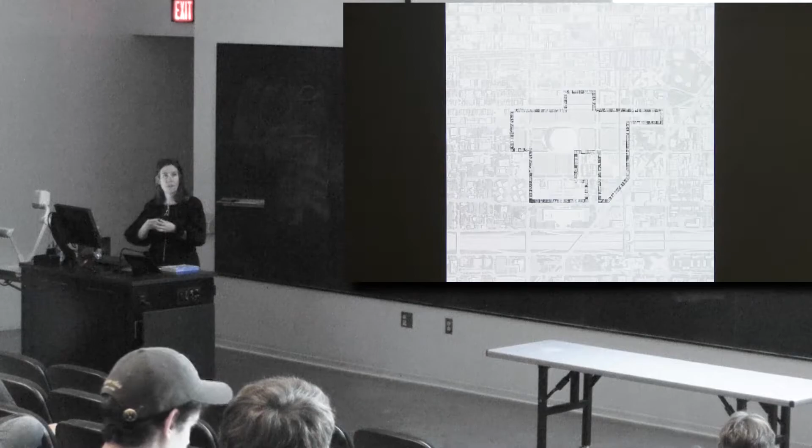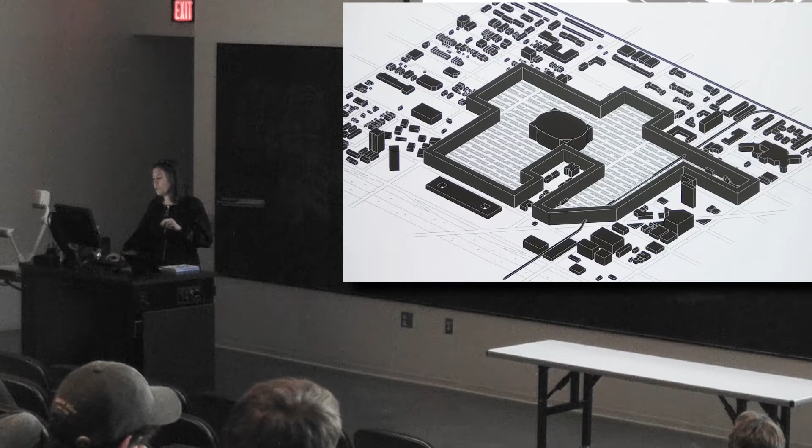And the boundary we proposed is a thickened zone that is not so much a wall, but actually an occupied giant building made out of a Chicago prototype called the 3-flat, which is stacked together and has figure. We're pretty interested in always inventing a kind of figural quality to our projects—it aggregates together and becomes a kind of almost sponge that rings the United Center.

Parking still stays there, but the neighborhood zone around it, which is currently—no, maybe?

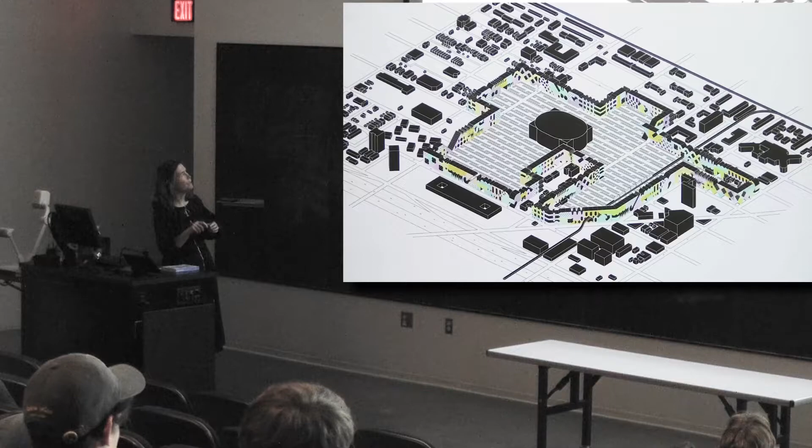So the book is organized into a number of chapters, covering process, form, and organization. The first half deals with the eastern side of the United States, and the second half deals with the western side of the United States.

On the eastern side of the United States, east of the Mississippi River, we actually have plenty of water in most cases, especially in the Great Lakes region. We have 20% of the Earth's fresh water on deposit in the Great Lakes, so we don't have a problem of scarcity there—we actually have a problem of stewardship. On the west side of the United States, we have a problem of scarcity.

So we break this into: what do you do with a lot of water, and what do you do with not enough water. And how do you do it in such a way that you not only solve technical issues, which other professions can solve just as well, but how do you leverage that into creating new possible publics, new ways to live? So how do you make it a cultural project?

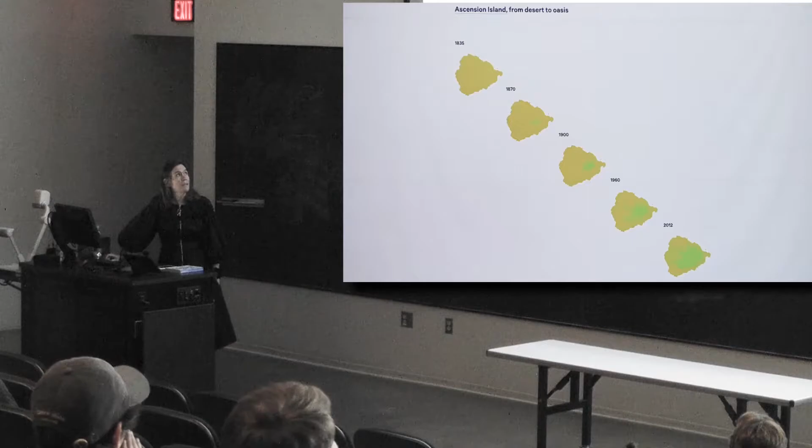Now they have these big storms of sand. But what you could look at as a more positive intervention is what happened on Ascension Island starting in 1835, when Darwin and his ship landed there. Through productive insertion of new plant species, they turned what was a desert island into a tropical paradise. So we've been designing our landscapes and environments for quite a long time. We have to be very careful in how we do it, but sometimes we can actually do something right—this went from something formerly barren to something super lush.

What he did, with some associates, was bring in a series of different types of plants and plant them at different elevations, and they took over, going from a desert to a lush landscape. We don't propose this extreme amount of intervention—our projects are very theoretical, and we're not expecting them to actually happen. But what we are interested in is furthering the conversation to think about what if we did rearrange the city in a different way.

So one project is about Chicago and the various areas there which are losing many manufacturing jobs. We propose to make a free water district in these areas, and propose that other cities around the Great Lakes could do the same—almost a new system where companies could come to the city in these free water districts, set up shop, and use as much water as they want, which is pretty controversial. But they would be responsible for restoring the degraded landscapes that exist there now, the brownfields left after our industrial revolution, and for cleaning any water they don't use and putting it back into the Great Lakes.

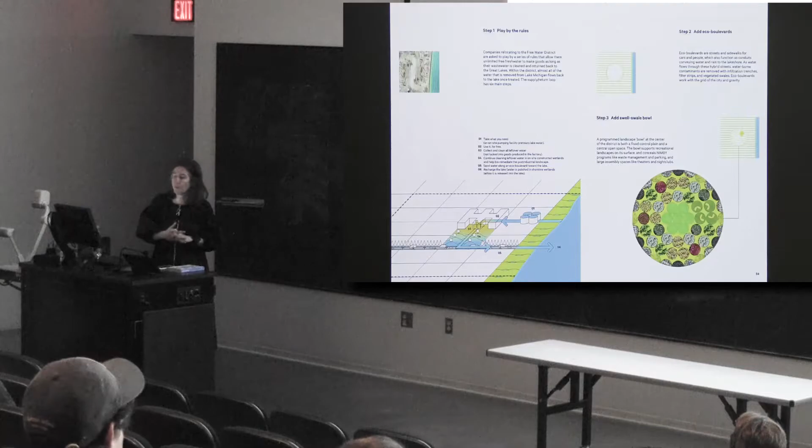This project actually started through a competition, kept going, was of interest to one of our previous mayors, and lives on as an idea that can be thought about—we think about it in our practice as a kind of real thing, even though it's theoretical. We actually exhibited it at the 2012 Venice Biennale.

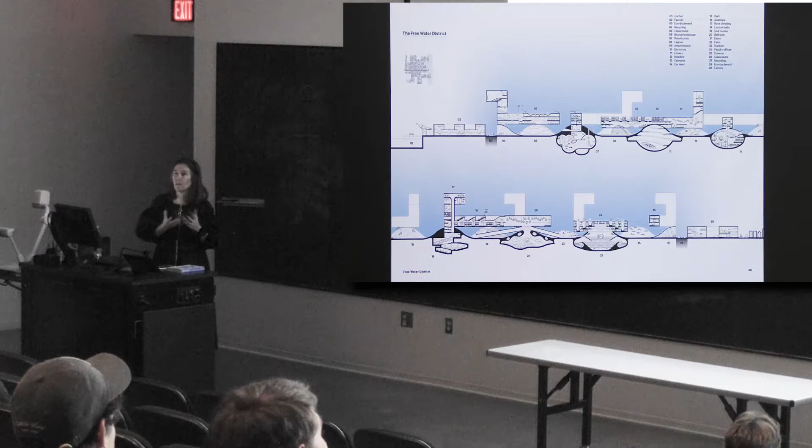This particular bowl is both a technical bowl, in that it organizes water, and a cultural bowl, in that it organizes new social systems and introduces new possibilities for how to live in Chicago. This section cuts through a proposal for the center of the project.

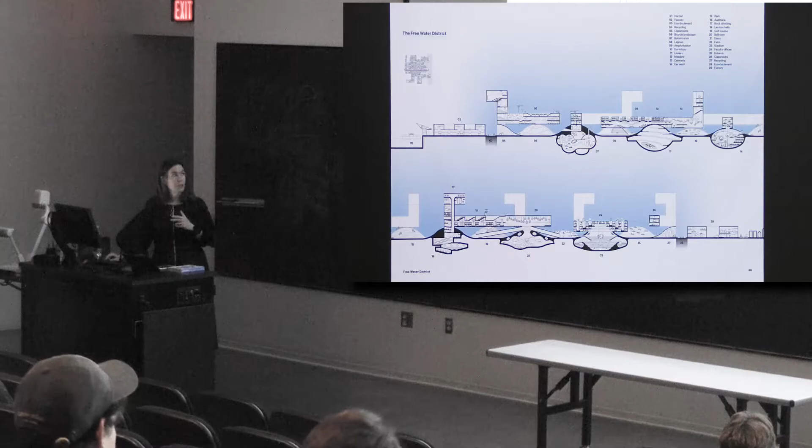This would be a new R&D university that would organize all these new manufacturing plants around it, providing jobs and training for the neighborhood. This is what it might look like afterwards.

We're always interested in figure and field. Sometimes what we're producing is at the scale of a city, and it might be a figure at a very large scale. Then you zoom in, it's at the scale of a field, and then again a figure up close. This project started with thinking about how Chicago currently takes its water out of Lake Michigan and does not put it back.

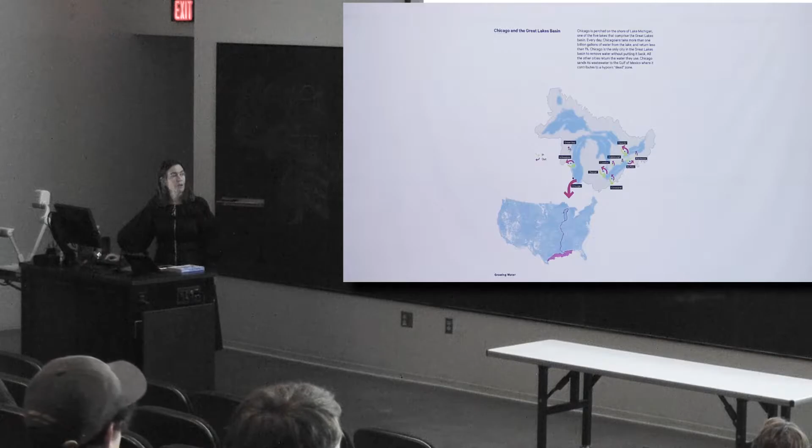We're the only city on the Great Lakes that takes water out and doesn't put it back. We actually put it into a whole different watershed. In the Mississippi watershed, it ends up as part of the problem flowing into the Gulf of Mexico, with all the pollutants creating these issues in New Orleans.

A long time ago, 100 years ago in Chicago, we made a cut. We reorganized the bowl system and connected ourselves as a link between the Great Lakes watershed and the Mississippi watershed. This is the main reason for Chicago's success—you can ship something from New York down to New Orleans, and it will go through Chicago, and Chicago will somehow benefit from that.

That was the economic generator or driver of Chicago, and still is. But the side effects it produced are extreme—we're pulling out millions of gallons of water every day and not putting them back. Our proposal is to use the organization of the city itself to collect that water, clean it, and put it back into the Great Lakes.

Much of the water pulled out is used for a variety of purposes. Our city is organized on a grid, so we propose to use the grid to take water that's used, then cleaned, and put back into the Great Lakes. Every east-west street, every half mile, would become a boulevard by which we could transport clean water back to the Great Lakes.

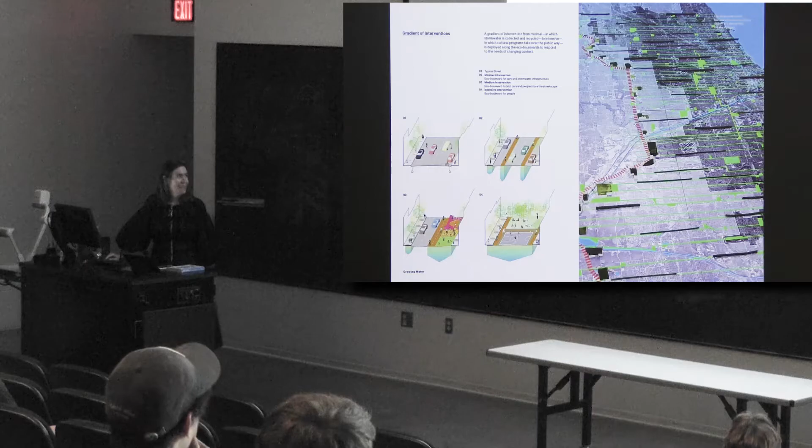It's pretty extreme to propose to Chicago that we replumb the whole city, so obviously we had to rethink. But these ideas come up in future projects, which I'll get to.

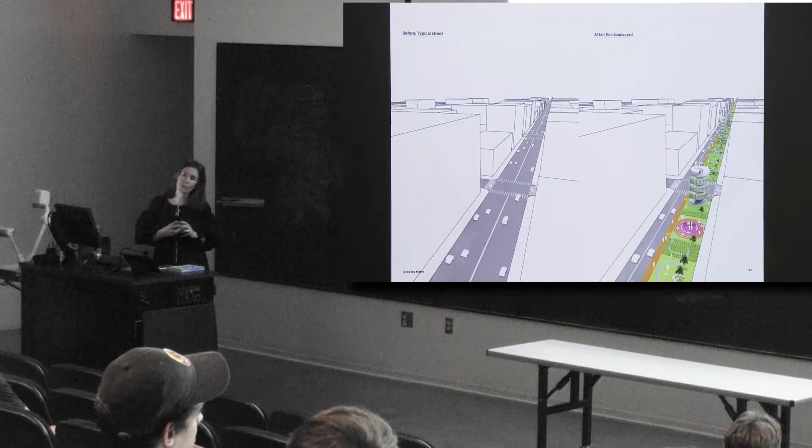And how it might affect how we live in the city: every Chicagoan would now be only a quarter mile from an amenity connected to the lakefront. Right now, people who live close to the lakefront have a lot of amenity with a beautiful landscape, but many people are very disconnected from the lake. This draws the lake amenity through the city at every half mile, so you're only about a 10-minute walk from it—a project trying to be more egalitarian about our resources.

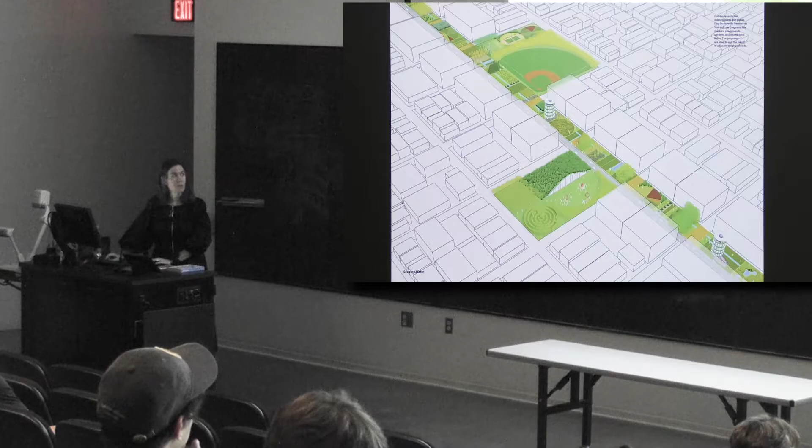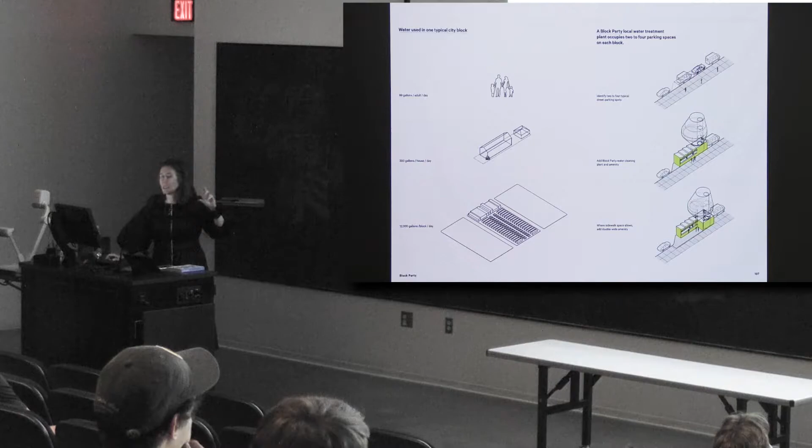After that, we started thinking: if we can't replumb the whole city, maybe we can plumb little parts of it. We started thinking much more micro—little elements that could be popped into a couple of parking spots and would clean the wastewater of a single block. You could do this incrementally over time, a lot less of a big infrastructural change, but we're always interested in leveraging the investment into infrastructure with the investment into the cultural.

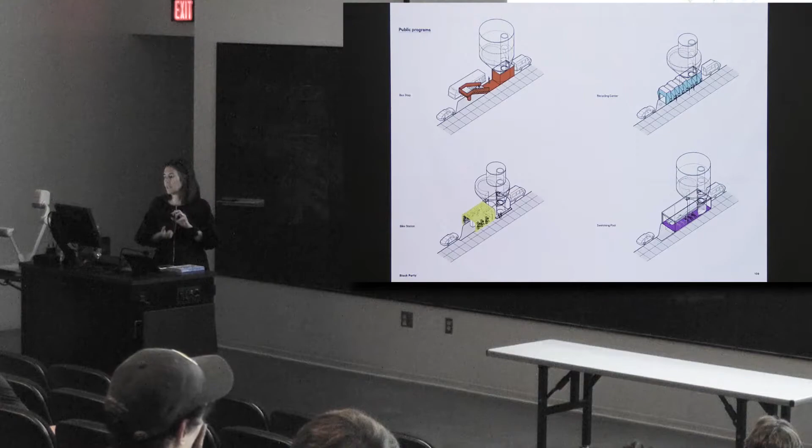Each one of these is also something else—a bike station, a bus stop, or even potentially a swimming pool, which, with all the clean water you have in excess, could become something you've never had in the city before: a little swimming pool on your block.

These would be cultural markers—little figures in the neighborhood that go throughout as a way of signifying where you are in the neighborhood.

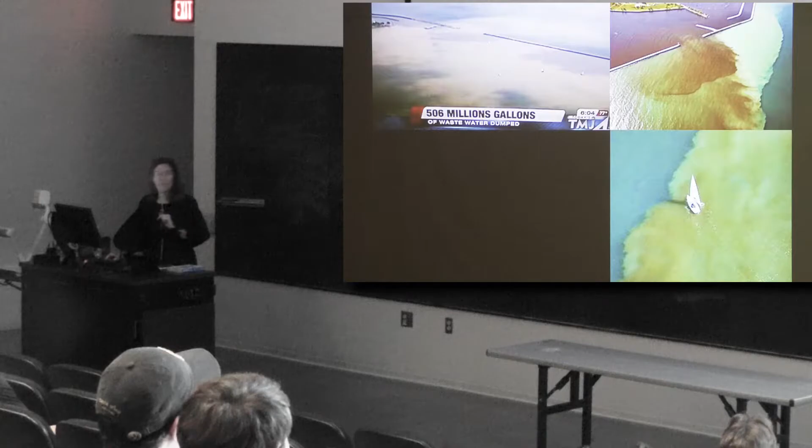So we also started thinking about our extreme rain events that happen now. They're supposed to happen once every 100 years, but the 100-year rainfalls seem to happen with much more frequency at this point, and there's obviously speculation as to why.

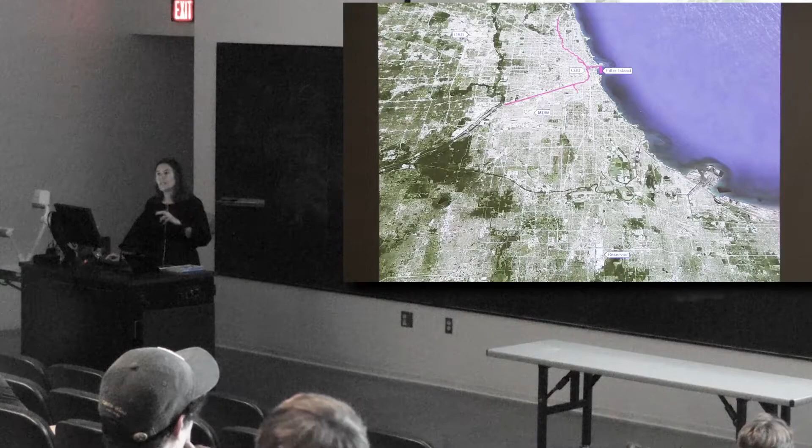So we propose to actually take that infrastructural investment and reorganize it, putting it not in the suburbs, which is not where the problem is, but in the center of the city, at the mouth of the Chicago River and other rivers in the region. When the city has a big rain event, we take all of our water, collect it, and put it down the Mississippi River eventually. But when we have a giant rain, we can't actually process the water fast enough.

So often what we do is we just dump it into the river, and then we get really gross stuff in the river. And then when the river gets really full, we actually open the locks and send that river into the Great Lakes, into Lake Michigan, which is really bad because that's also where we get our fresh water.

So we proposed in a kind of Burnham-esque manner—I'm not sure if you know about Burnham's ideas for Chicago, the 1909 plan, this is the kind of result over here on the left—a reorganization. He didn't only invent the lakefront and the kind of Beaux-Arts amenity that it is, but he was proposing transportation infrastructural changes, water infrastructural changes, very many different things that actually don't really get thought about.

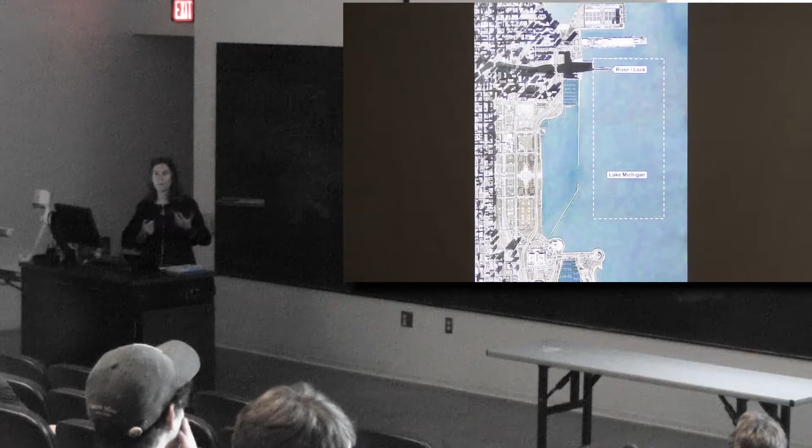What really gets thought about when people say the Burnham Plan is the kind of physical park that is the center of the city. So we're proposing at the scale of the Burnham Plan to think about how we could take water and clean it before it gets dumped into Lake Michigan.

So at very large rain events—ooh, okay, there's a plan, it's not showing up in the way. Let's see, okay, you have to take my word for it—the city would collect all its water rather than in the suburbs here, clean it, and then put it into the lake.

And in the kind of cleaning landscape would also be all these cultural programs, from skate park to art museum to wetland, bird watching sanctuary to concert venue. And these would be kind of integrated within the landscape of water cleaning.

We did this model actually for the first Chicago Biennial, which is, I think, the only way I'm going to be able to show you what it looks like because my plans aren't showing up. But it is this very figural thing which takes on qualities from the Burnham Plan and repositions them in order to make a new public amenity that is both doing a technical thing, but at the same time bringing people together in public space.

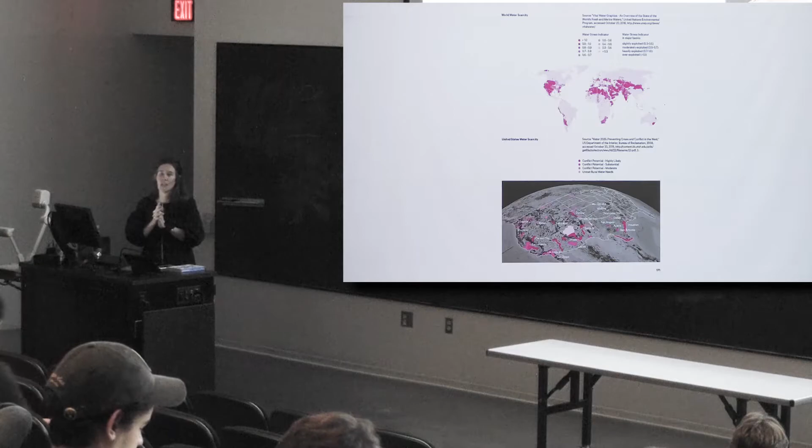And then, as I said, the second half of the book is about Death Valley and the Southwest, and it's even more crazy than the first half. We propose to think very seriously about water shortages and sea level rise, and think about what you could do if you actually flooded Death Valley. We're not really proposing to flood Death Valley, but we're proposing to think about what if you did.

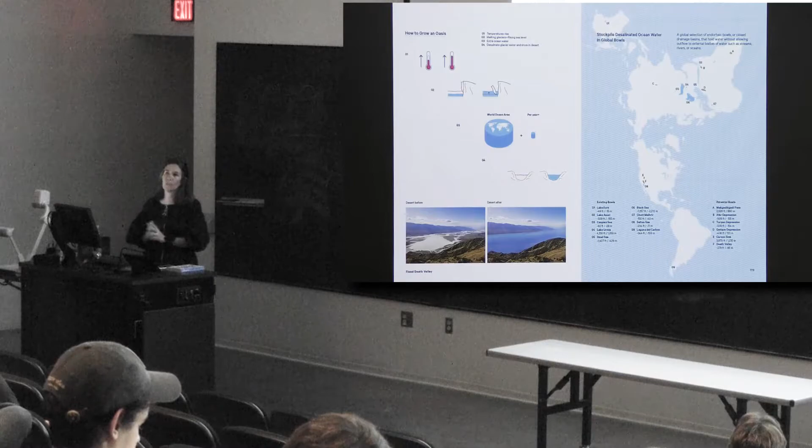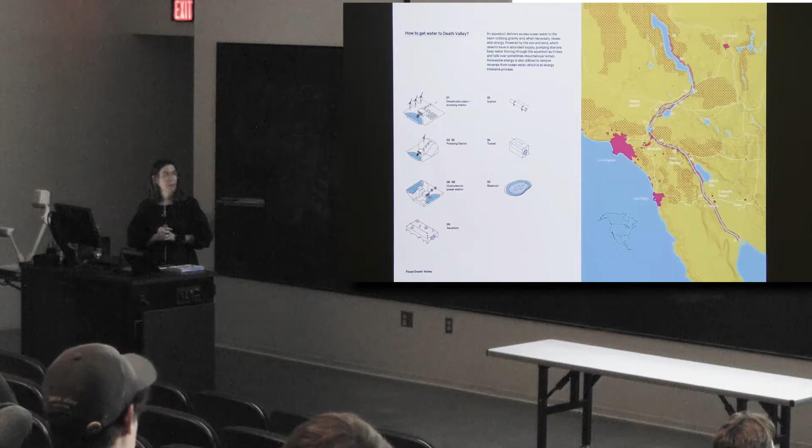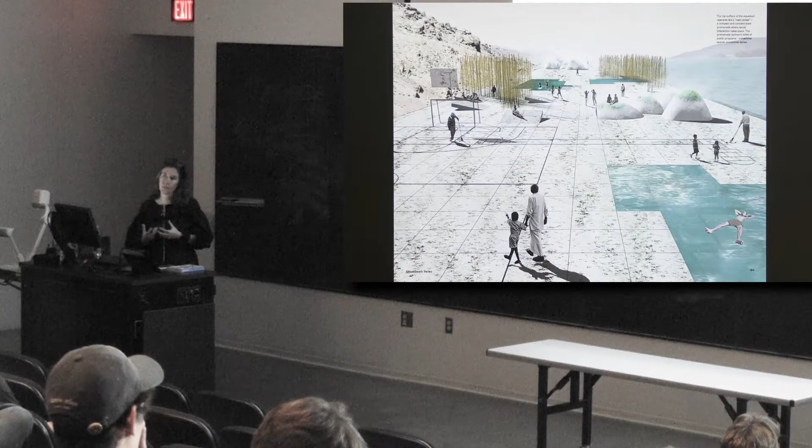What if you thought about different ways to live in the Southwest? Living perhaps more communally and in a way that collects water into these depressions which exist in the Southwest that can hold water. Could you then imagine new ways to live and have a kind of excess of water, which the Southwest has never had? So it entails designing an aqueduct which would pull water from Baja California and pull it up into the valley, into Death Valley.

And again, we're pulling, this is our collage, this is Superstudio, we're totally ripping them off, but they're okay with it. I got it in writing. Got their blessing.

But how can you productively engage with the crisis of the environment that we have right now? What can you think about? This is a model that we made for the Chicago Biennial in 2017, in which we're looking at the elements of Superstudio and our elements, in which we propose this aqueduct that you can live on and under and above.

And it was super popular on Instagram, which was also one of our goals. So this is the different ways that you could live with this aqueduct, and this is the flooded Death Valley, so this is all now fresh water.

We looked at town morphologies and how could you create a new type of town. This is our version of the town, so you see the aqueduct going through, and you see these town houses, which all kind of packed together, and of course it's super hot there, and shade is actually where you want to do public space.

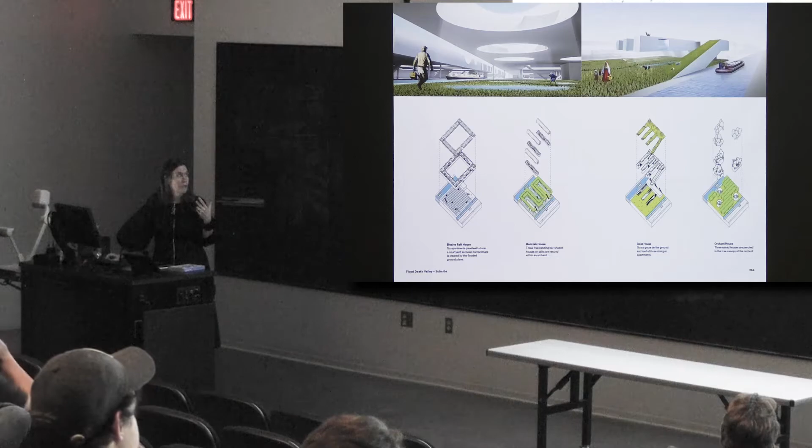And always interested in how these elements kind of work together. So you would get this kind of giant mat building that actually, in the experience of it, would still be pretty suburban, and we thought that an interesting way. And this is how you might live in that suburb, kind of like John Wayne, out in the desert, but with lots of water.

So that's one part of our project, and I'm going to switch to the other part, which is what we also do.

We take that work, we're always doing that work. Sometimes it's solicited, often it starts as a solicited thing, and then the thing is over, like it was a competition, the competition ends, and we keep going, and we keep thinking about it and working it. So many of those projects started as either a competition or some kind of workshop, and sometimes we invented them completely on our own. But then they start to inform some of the projects in the office, even the very small ones, I think. Maybe not so directly, but indirectly.

So I'm going to start with the kind of projects that we actually do in the office. We approach all the projects in the same way. So even though I've split the projects in half in this lecture, we approach them the same way.

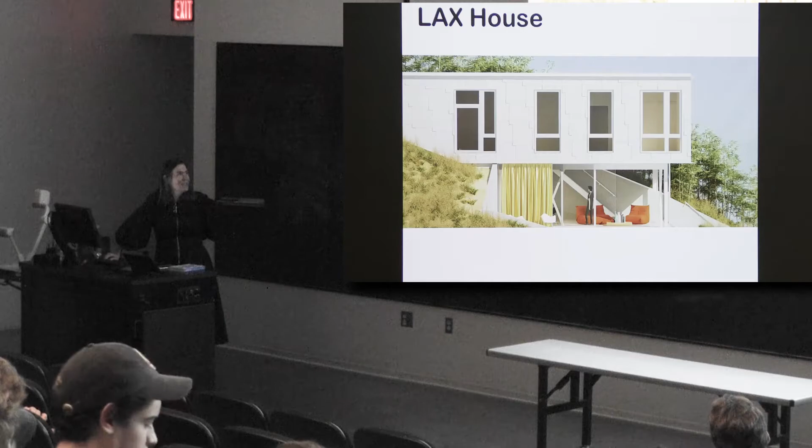So this is a rendering of it. This is what it's supposed to look like, but it doesn't quite look like that yet. This house is at an interesting spot, on a hillside. It's LA, so it's very hilly in parts, and it has two beautiful views, one to the Hollywood sign, which is the classic LA view, and one to the mountains, which are also super beautiful.

Our initial idea, which we pushed all the way through, is to tweak the understanding of the landscape and embed a private bar of living into the landscape, or at least make it feel like that, and then underneath that have what we think of as a more publicly oriented group space, like the living space, and to do those two things within a budget for a family client, and then have that person, my brother, be the GC, and he's not a GC.

So it's a little bit tricky, and that's why it takes a long time, but this is the diagram, the model, of what we were going for, and sort of the normal things in the house: living space, garage, living spaces, bedroom spaces, and then how it kind of fits into the landscape.

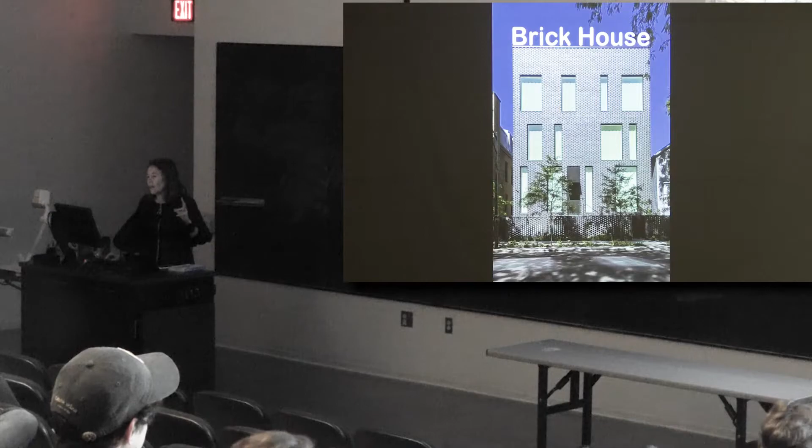And then sort of going up in scale, these are all going up in scale. The brick house that we did in Chicago is also a constraining project in that it's a large house, and made even larger by the fact that all the houses next door to it are very small. But again, can we organize landscape together with architecture so that you get this possibility of living both with landscape and with architecture, with the lowest level peeling up to become a hill.

We actually got hired for this because our own house and office, we created a hill, and the client saw our hill and decided that he wanted one too.

And so we made them one. I think I have a photo. We got to have fun with brick.

It was trying to kind of dematerialize the massive quality of the house, but the house is still pretty massive. But here you see the landscape that's coming into the house. There's also landscape carved out from on top. This is a courtyard at the top level of the house, and here's the hill that hides the parking garage underneath.

And then produces a kind of play space for the kids, dematerializing even into the stair. So we have this perforated metal stair that folds all the way up to the top floor, and it's a little bit scary when you're at the top looking down.

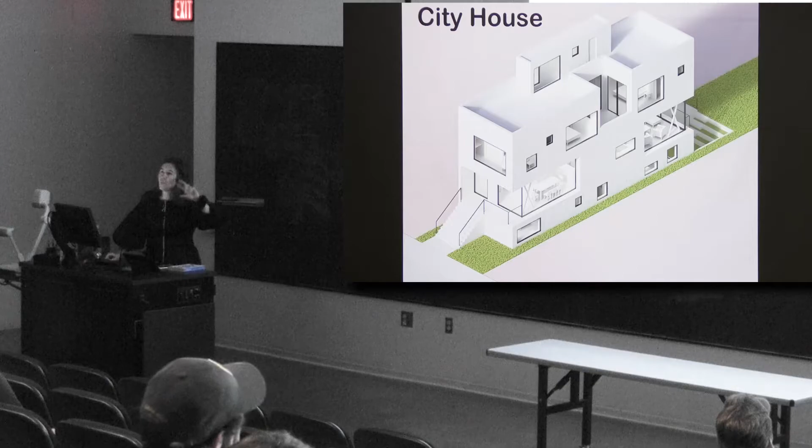So that leads us to this house, which is actually in construction right now, which is a smaller, more modest version of that, trying again to look at how we can live in new ways in the city. It takes the typical Chicago house and just kind of messes around with it a little bit.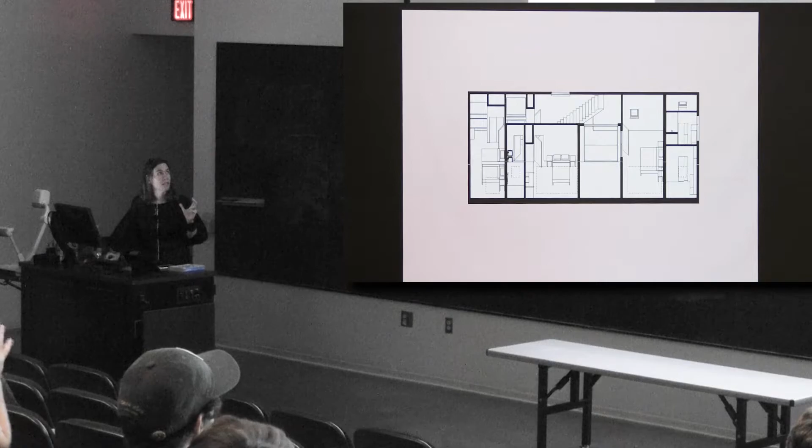Let's get to this. So it's in construction now. I think they just did the installation today, so I don't have any photos of that. Eventually, these will give way to something finished.

Here's a much smaller version of connecting the landscape at the back of the house. We're also interested in just the very banal Chicago views you get when you look sideways. Most of the time houses are organized with the narrow front and narrow back to look either at a really ugly alley or at a pretty nice street. But we're pretty interested in the side views that are usually not considered. So we're looking at that.

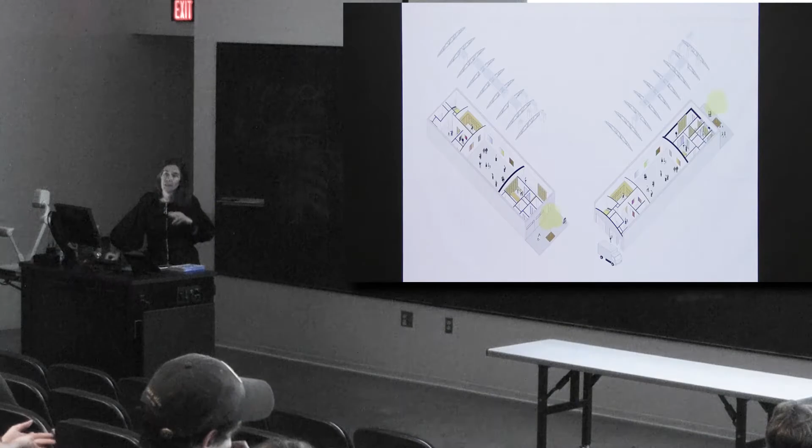And then going up and getting a little bit more public. This is a renovation of an existing building, so I'm getting larger in scale. And in this one, also looking at the possibilities of both living and working here.

The clients were interested in having something perfect, and in fact this gallery is actually golden sections, so they were really interested in a kind of perfectness of it. And in smaller galleries, but what we spent a lot of time with them on was the private space and the living space, and how can you make a gallery also feel welcoming and cozy, even though it's pretty neutral and cold.

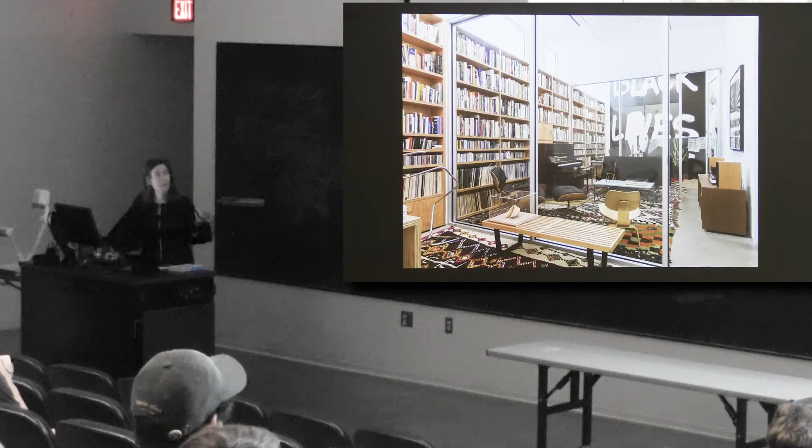So designing in that way, thinking about how you spend your whole work week here, how do you almost live in it, to the point where the private offices in the back are modeled after a kind of living room type of space. And this is that space, and then the back of house also.

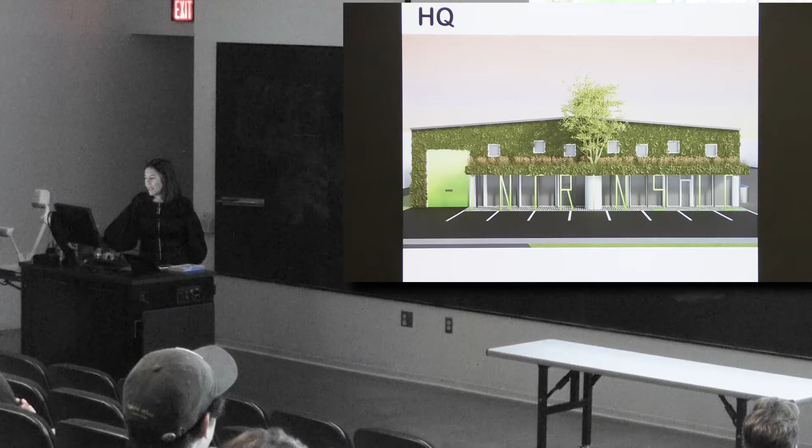Right now we're doing another building for a different kind of client. This is a landscape company that pretty much does all the green roofs in Chicago, and we met them because they did our green roof, and we've been friends ever since. So they wanted a very green, literally green building, and their company is called Intrinsic. So they got this building, and we're doing an extreme renovation of it.

They basically want to showcase their work, but we don't want it to seem very showcasey. We want it to seem much more organic. This is in construction right now, and the interesting thing about it maybe is that the space, while kind of big, could become intimate and produce interesting views throughout, with a few moments tweaking here and there, and produce potentially interesting architectural effects.

And this is actually the first headquarters we built, which is for a group called Upton's Naturals. They make vegan meat replacement stuff, and it's pretty interesting, and they're probably in your local supermarket at this point. When we met them, they were much smaller, and they were working in one place, living in another place, and they wanted to kind of pull everything together.

So this is a kind of a study in how can you, with a very modest budget, and a lot of program to squeeze into a tight space, play around with any kind of figural quality with this super low-tech strategy of precast panels.

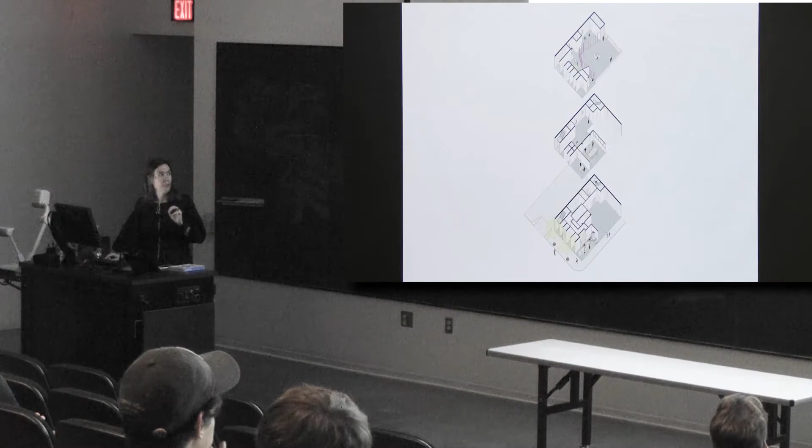The second level is storage and office, and the third level is apartment and yoga studio. And it's all in 8,500 square feet, which is really not that much when you put all those things together. So it's almost like a three-dimensional sort of Tetris puzzle that fits together.

And somehow works. This is the cafe, office, processing, their apartment at the top floor, and their space for entertaining. They have events, and their yoga studio, which also kind of has to function separately from everything else.

So kind of complex, but in the end, fitting all together, and doing some technical things, but really we're not there yet. So getting larger in scale still.

This is a project that we did together with Kelly Bair and some other faculty at UIC for a new campus performing arts building. This was a couple years ago, and it's now kind of morphed into a different project that OMA New York is doing. But this was our thinking for it before it became a separate thing.

But to take the campus and kind of invert it into a building that could change over time potentially, depending on building horizon and budget. So we started with this idea, and this is starting to get closer to maybe a relationship between

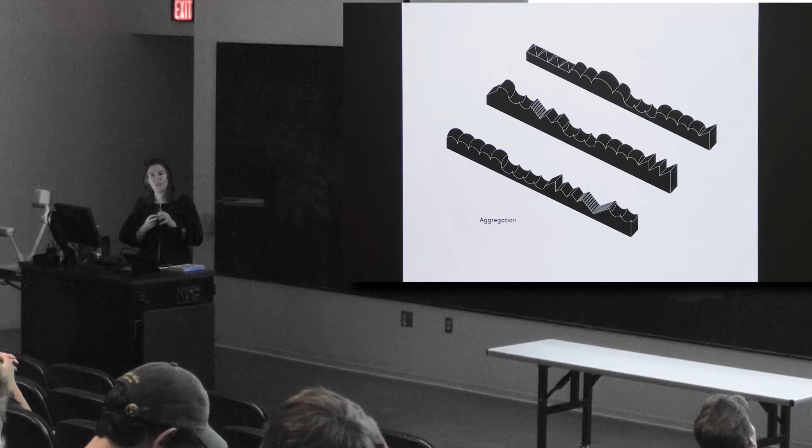our completely theoretical work in the book and trying to pull that into a real project. Then we start with these elements, designing each to have its own identity, and then we play with how they aggregate together and how they can both produce a figure and a field, both in plan and section.

So playing around with these ideas, but also trying to fit 300,000 square feet of program into the project, to think about how two different faculties would come together, a visual arts faculty and a music and theater faculty, which don't necessarily want to be together, actually. And in academia, sometimes people don't really want to hang out together.

But how could you actually produce both space that would make it convivial to interact, but also have disciplinary depth in section so that you could do your own thing and actually produce silos on purpose, but then with the public space at the ground floor so that you could actually get both.

So it sits on the edge of the campus. It wants to do everything for everybody all the time, like all clients. It has to function with these 4 very specific performing venues, and then also allow the artists to have their proper space to do their work.

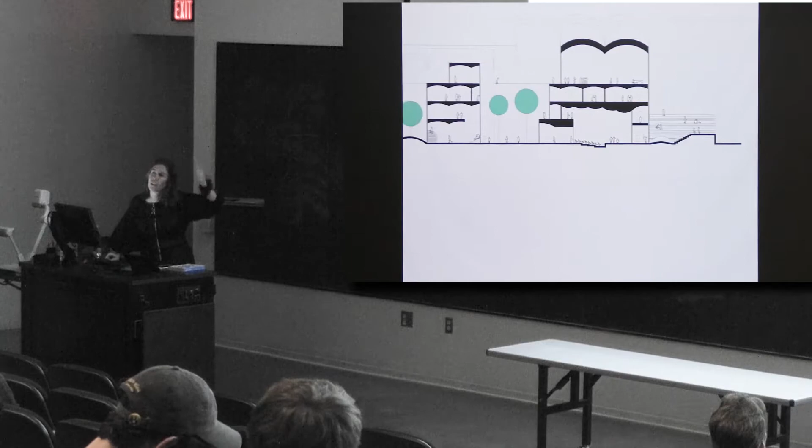Anyway, so when you cut the section through the building, there's invariably at least one courtyard, which brings light and air and visual relief deep into the building, which is a mat building, but kind of a mat building because it's 3 stories tall. So most mat buildings are not that tall, so it's a kind of combination of a number of things. And looking at that, and then looking at how it lives in the world.

It's right next to the highway, so it becomes a symbol or a sign for the university that something new is possibly happening. And then how does it live both on the street, at night? It changes with these fins that have glass behind them, so at night you read the interior more than during the day when it seems a little more opaque.

And then figuring out the kind of entry sequences and lobby spaces, because it should function both for high culture and then also just everyday down and dirty making things.

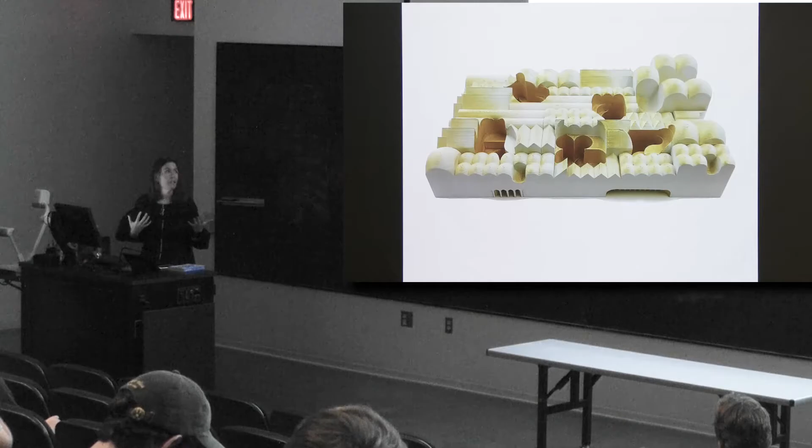I think I could tie a direct connection between the United Center work and some of the Death Valley work into this project, getting kind of more larger and larger. This is basically a playground.

We call it an outdoor learning center because it's for a school that's really interested in using play as part of pedagogy. We did lots of research with the faculty and the board, and it's really interesting. There's a direct correlation between playtime and how children's minds develop, how their brains develop, and crazy relationships between hanging upside down and math skills, or doing climbing and maybe more obviously building up self-confidence.

Part of the problem with playgrounds today is that they are very safe and they feel very safe, but we wanted to design a playground that was safe but felt unsafe. Because actually, in our research, children should be challenged and feel like there's something at risk. Even though there might not actually be anything at risk, they need to feel like there is in order to help their development. So that thing on the floor is not a kid, that's a doll.

But this is a gift. This is a project that unfortunately is on permanent hold. But I still like it, and I feel like it fits within the narrative of going from small to big. It is for another academic client.

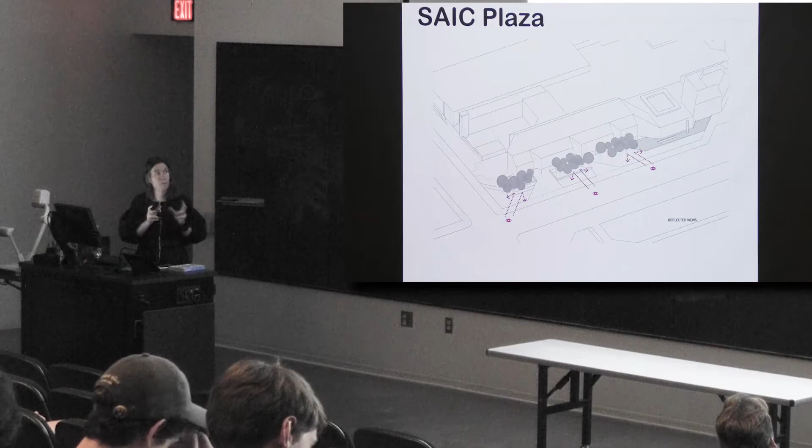This is the School of the Art Institute in Chicago, and this building is right next to the school, right next to the Art Institute. But you never actually notice this building. It was designed by Walter Netsch, and it has seen better days.

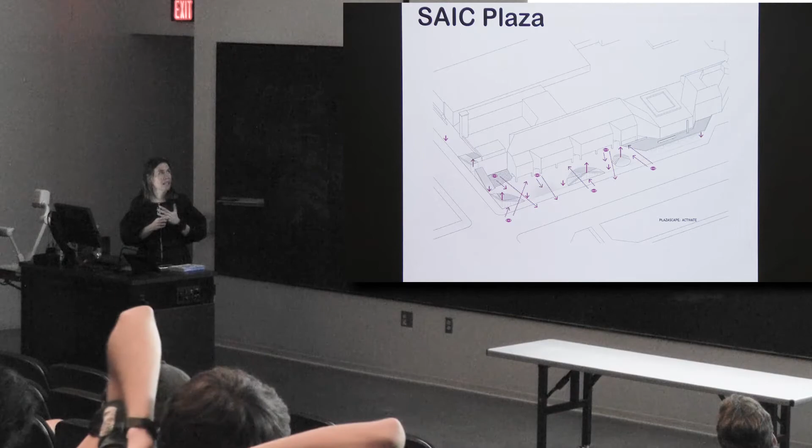It needs to be, the landscape in front of it needs to be rethought so that the beauty of the building, which is pretty severe and an acquired taste, can be reappreciated. So the School of the Art Institute has no public space for its students.

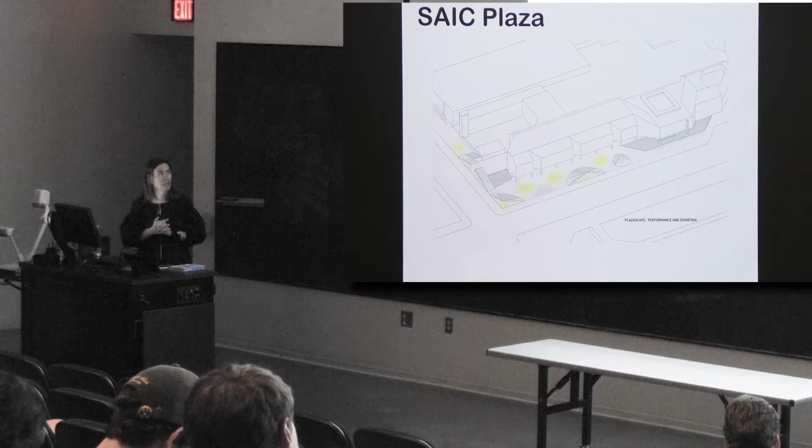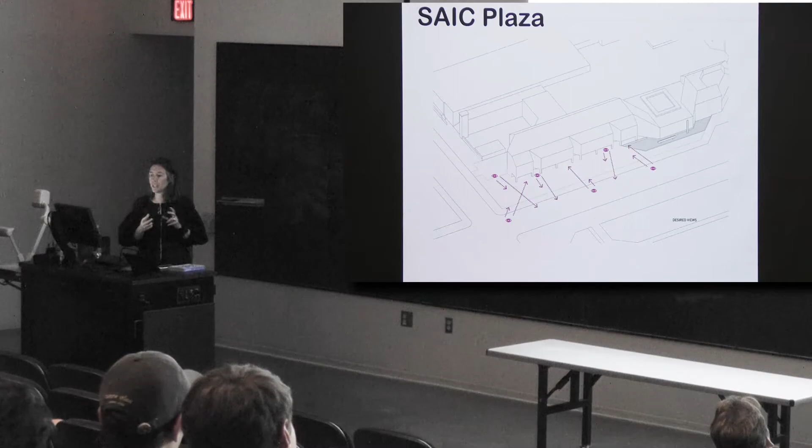It's in the loop in Chicago, and there's no public outdoor space for it. So we were commissioned to rethink the space in front of the School of the Art Institute building at this corner, and think about how we could take the existing plaza and reorganize it so that it could do more than be a lot of trees obscuring the building.

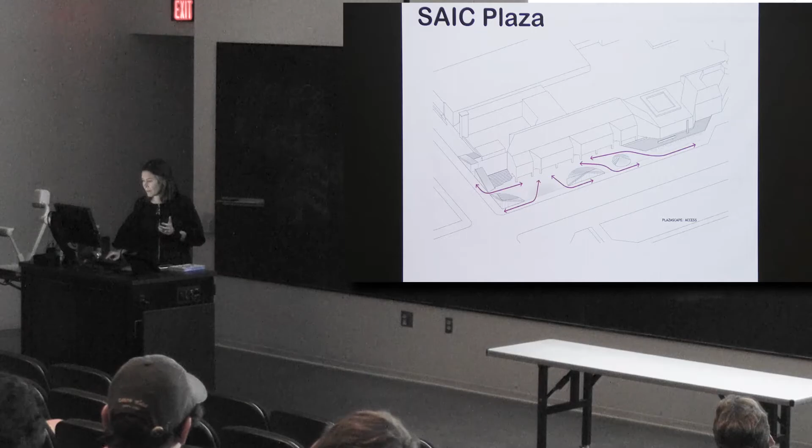And so we thought about this landscape, which is very related to the landscape from the school playground I just showed, but a bit bigger, and how we could activate the space, but also make a separation between the city and the school.

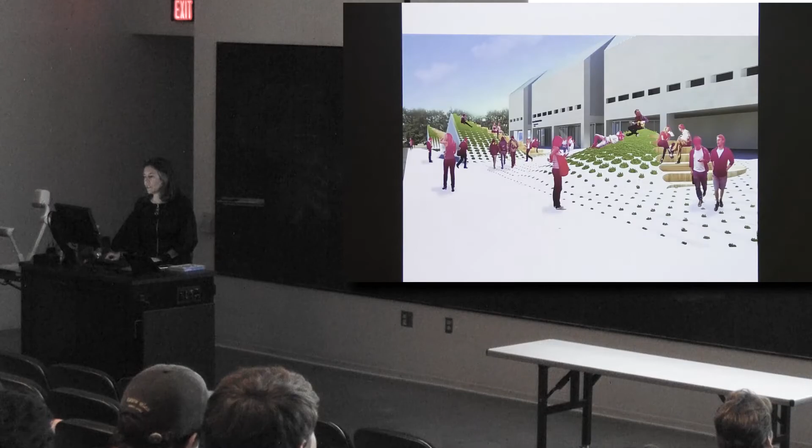So we introduced these mounds, which underneath are tiny galleries for the school's students to display their work, but on the other side produce these stepped landscapes that you can hang out on and also do different types of programs. They have a fashion department with a significant fashion show once a year, so that could happen here. They have musicians who could play here as well. It could also be sculpture that's displayed, and different types of art.

Another thing we have currently in construction, we're working with Epstein, which is a very large architecture engineering firm around the world but with a big office in Chicago, on a bridge. We're teamed with them because of our interest in water.

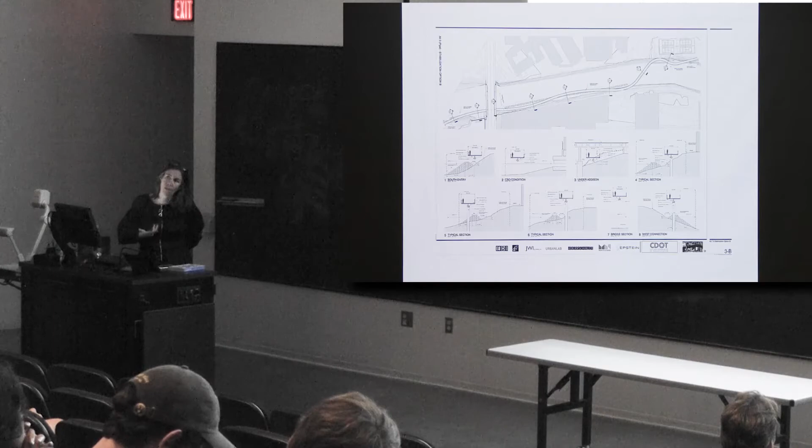We proposed that, based on research and studies we did together with Epstein, if we pull the path from the edge of the river, they wouldn't have to use eminent domain on the neighbors, and they could save the soft edge of the river by pulling the path into the river. So this is a series of sections showing how we pull the path into the river and wind it along, so we don't negatively impact the neighbors but also produce a healthier river, since a soft edge is a healthier condition than a hard edge.

So these ideas that get played out at one scale somehow show up at another scale. For our biggest scale, we're looking at cities in China where they're doing really large-scale work, so we can propose some of the ideas we were thinking about in the book at a large scale. This is a project in Hunan province.

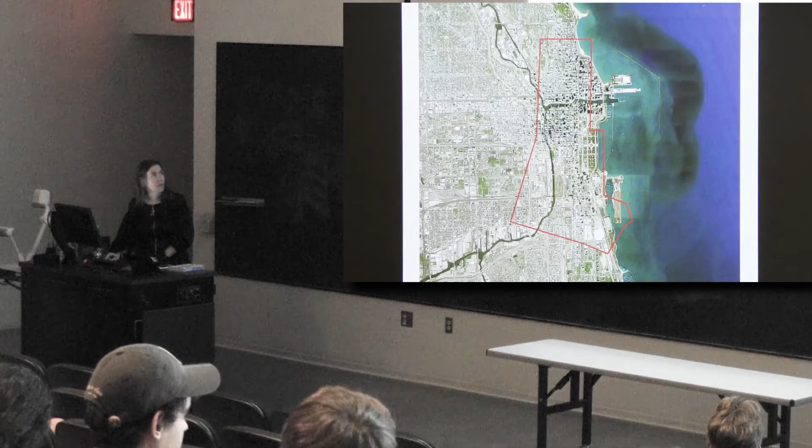The site area is the pink on the right. There's a very historic old city along a river that eventually ends in the Yangtze River, and this river regularly floods the area outlined in the site. There's an existing, kind of compromised lake-ish thing, which we wanted to reorganize. The size of it compares to Chicago—this is the center of the city in Chicago, so that gives you a sense of scale.

We are here actually testing our idea of the Eco Boulevard, which we originally proposed for the city of Chicago. For the city of Chicago, it's too much to think about, but when you're doubling the size of your city in a couple of years, it seems to make sense for this city in China.

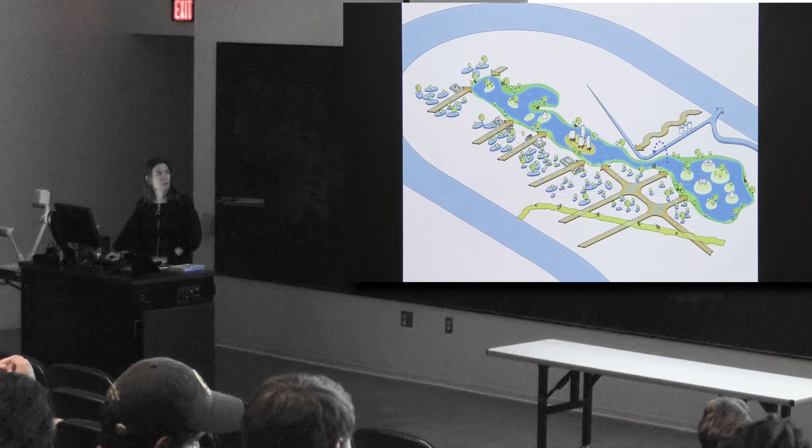This is a diagram using the Eco Boulevard idea and a new reconfigured lake in the center to collect stormwater, clean it, and put it into this lake. Then, as the river can handle it, it still needs to get pumped into the river, but there was no way around that portion of it. This is maybe the most direct relationship between the research I showed at the beginning and what we can do with it.

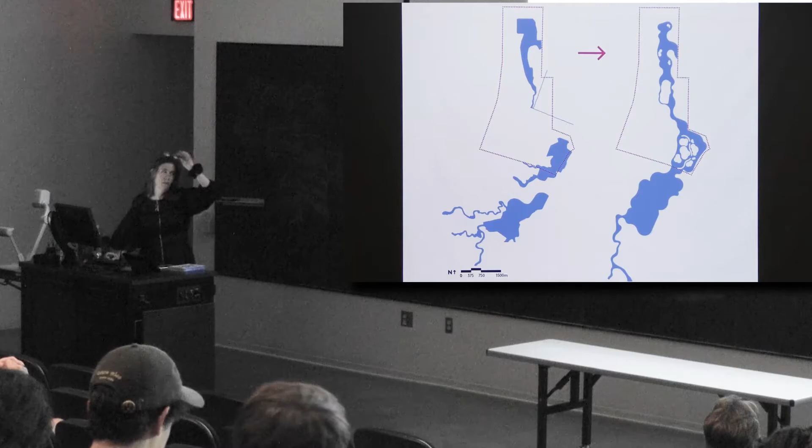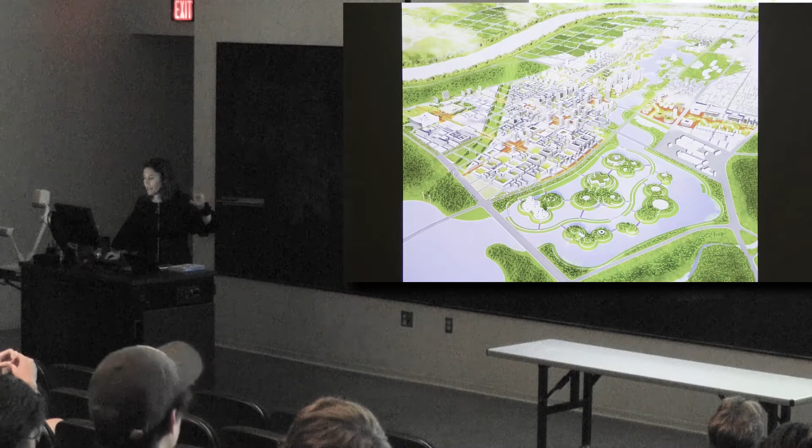So we reconfigured the lake for cultural reasons as well as technical reasons, making a series of islands. This is an overview of it. There are 8 neighborhoods that we're designing at an urban scale. We're not doing the actual architecture, unfortunately, but maybe someday. We're proposing it, and they're implementing this slowly now.

This is the idea of the lake as a cultural idea, not only a technical thing, but a place for collecting people and events and architecture and landscape together in order to see what interesting possibilities can shake out.

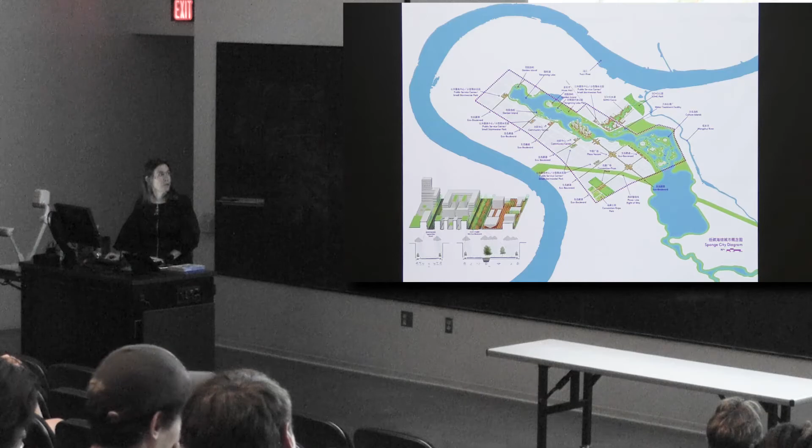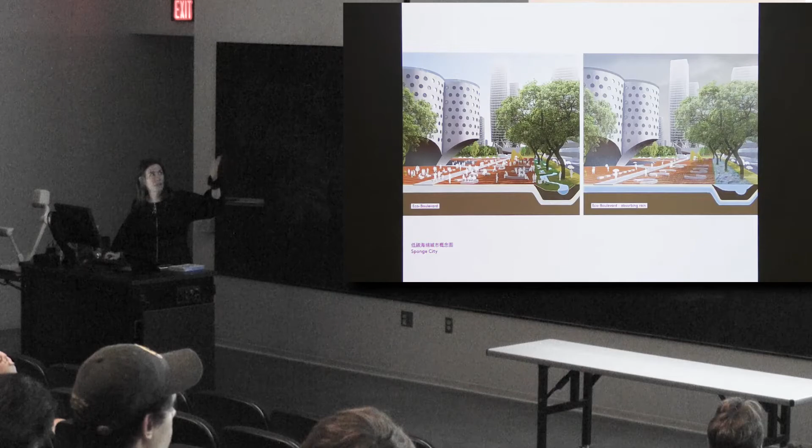On the left is a section of one of the Eco Boulevards, so that all the water that falls in this zone can be passively collected and mostly passively cleaned, then pumped up into the lake and then pumped into the river to keep going out of the region. This is actually the Eco Boulevard on the left in a dry condition, and then the diagram of it when it's raining and collecting stormwater.

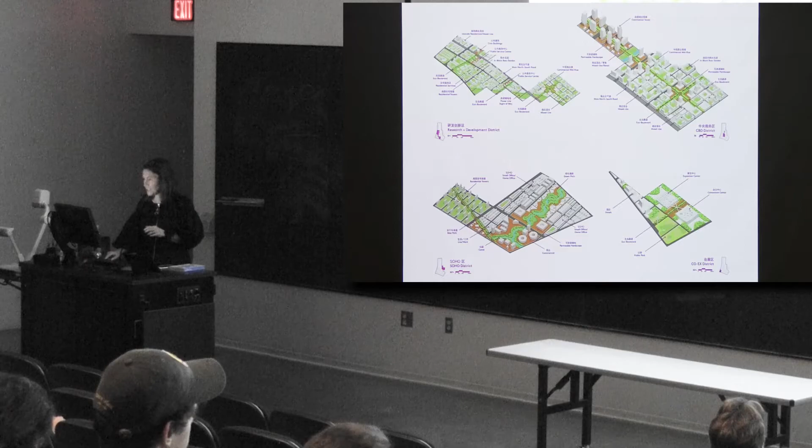We designed at an urban design scale in different neighborhoods in order to produce difference throughout the city. So it could be a successful central business district, a kind of exhibit district, a Soho district since everybody needs a Soho these days, an R&D district, various types of neighborhood districts, a logistics district, and a civic district.

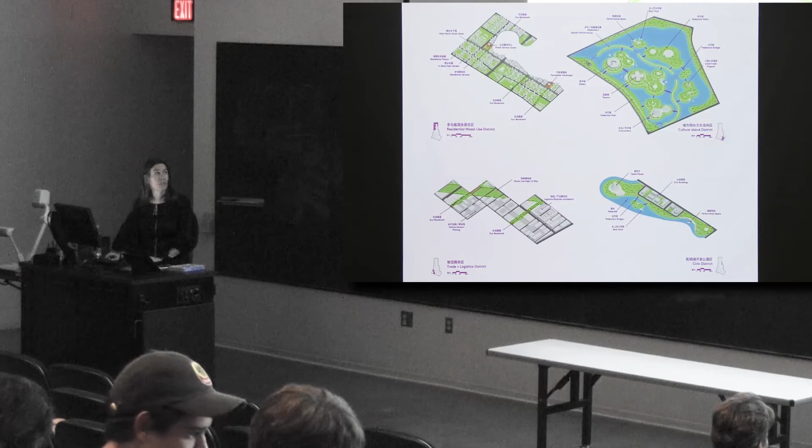The favorite one for us is the cultural district, which is a series of islands that have cute architecture on them that would be museums and theaters and a variety of places to go and spend your time.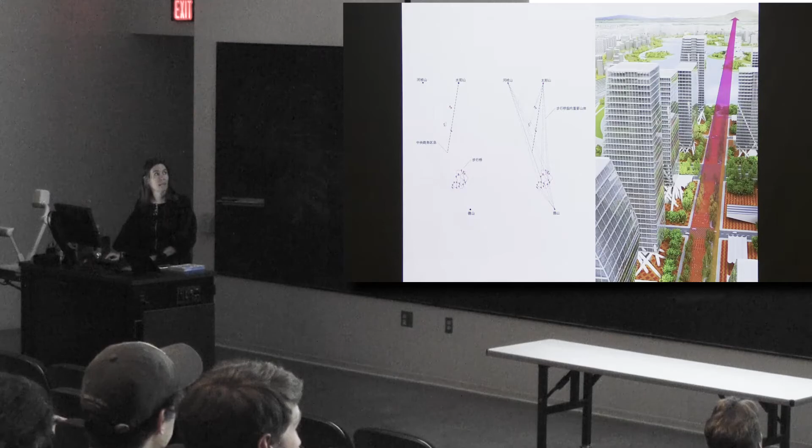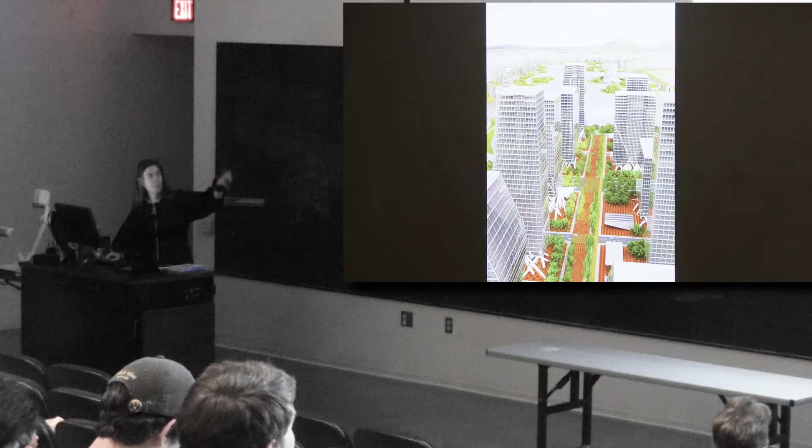We looked at important views, and this is a diagram we made to prove to the client that you would get a really nice view of a significant mountain in the distance. The Eco Boulevard is now manifest as basically anything you see that's orange.

Looking at different ways to produce, we designed an idea for a shopping district, neighborhood shopping districts, and basically did all of this in 2 months. So we did that really fast.

This is the cultural district, Soho, the Eco Boulevard—I think I'm going the right way—and the expo district, more cultural district.

That led to another project in China. This one, I think, is part of the Rejected show. So this one, we won the last one—we didn't really win this one. It was rejected.

A smaller city close by with even more water wants to develop further. This one had a series of really important wetlands that we wanted to be respectful of, and how do you reconcile the real desire to develop smartly so that you don't devastate the environment?

We looked at this as creating both a way to develop, but also a way to sustainably develop, thinking about what in your city you want to favor over other things. In this case, we favored a water-based economy, but they ended up wanting to favor a sports-based economy. So the sports guys won.

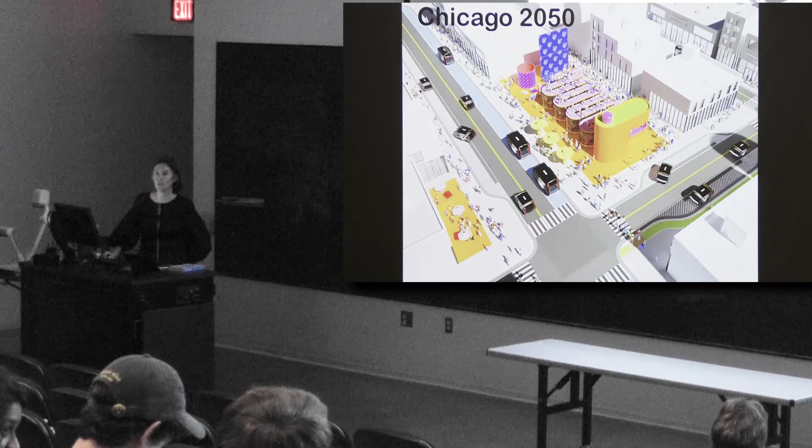The biggest project we are doing recently is rethinking the Chicagoland area for 2050. We were commissioned by the Chicago Metropolitan Agency for Planning to look at the region with them. Every 10 years they produce a white paper that in this case is 600 pages long, and it looks like this.

It's a lot of text, and we worked together with them to visualize what this means. It took 2 years, because there's a lot of text. But the idea was to think about what Chicago is now, and then project, based on their research and our thinking about how that could be architecturalized, what Chicago and its environs could be in 2050.

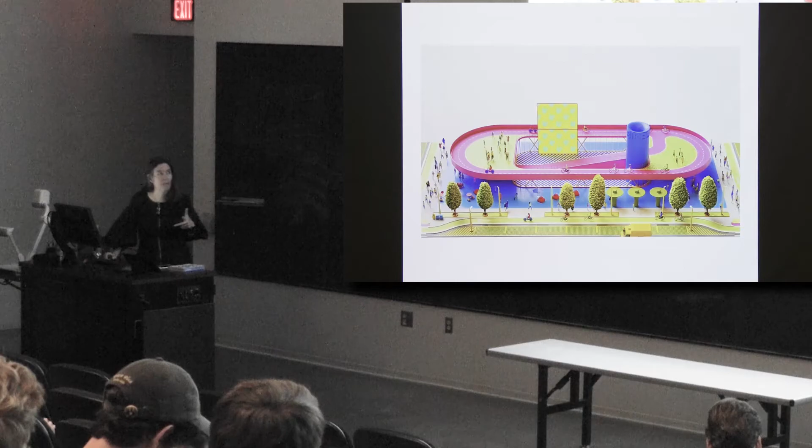So there's lots of thinking about transportation, different modes of transportation. There were 3 main ideas they wanted to work from, to do much more equitable distribution of investment. So they would prioritize investment into areas that had not previously had enough investment in previous plans.

And then we invented the architecturalization of these ideas, and worked back and forth with them. So all of the ideas we're working on in these images are reflecting their research and policies.

And so it's a lot. This is kind of it changing over time. There's also ideas about investment over time, so you can't change everything all at once. So we're looking also at how stuff develops over time, and thinking about that type of thing for them. And it's now their policy, it's part of their policy for the 2050 goal.

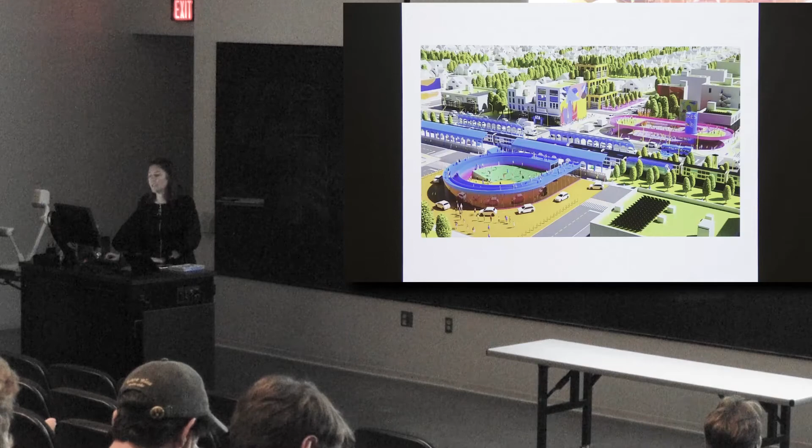And now we're actually working with them on rethinking the highway system in the region, and that's also going to take like a year. So you can see it would take a really long time to explain every one of these images, so I won't, but that work really comes from the research that we're doing.

And then here, I just thought I would show you a couple of, I'm sure that you're exhausted, but some things we're doing right now, which, again, going back in scale, a concourse for one of our favorite Chicago architects, Bertrand Goldberg. His most famous project in the city is Marina City, also known as the Corncob Buildings.

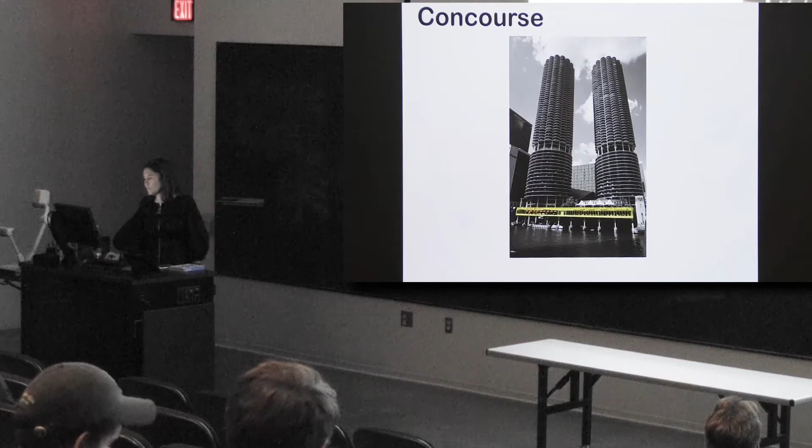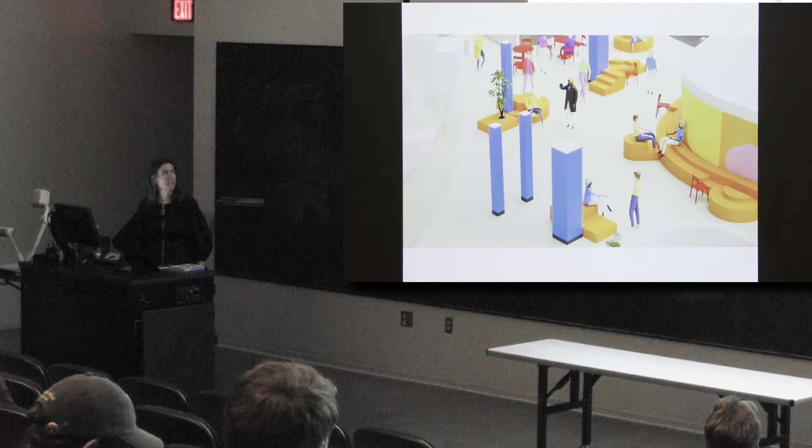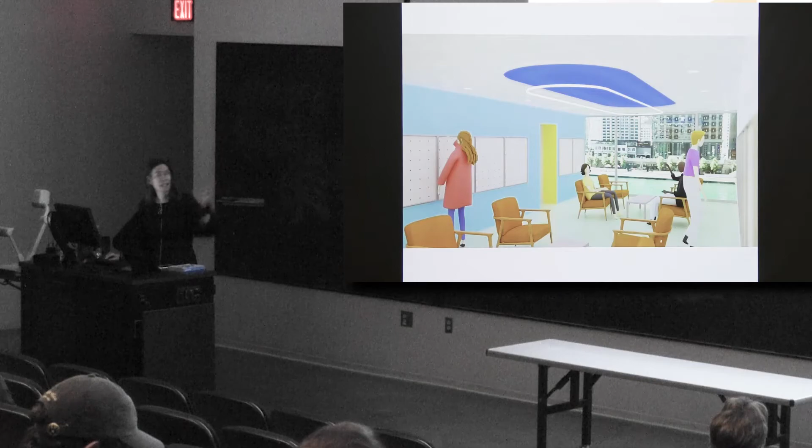But looking at this kind of plinth area that you don't really remember in the diagram, it's got this public space, and we're trying to reorganize it for both the residential tenants and the commercial tenants, and produce a kind of public space for them that currently is really barren and not very fun to hang out in, and to kind of open it up in order to have views out. And also to introduce a Bertrand Goldberg Center for the city, which surprisingly it doesn't have right now.

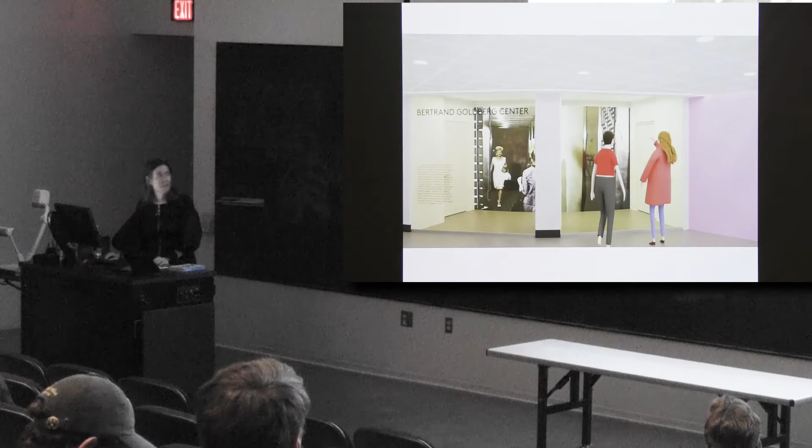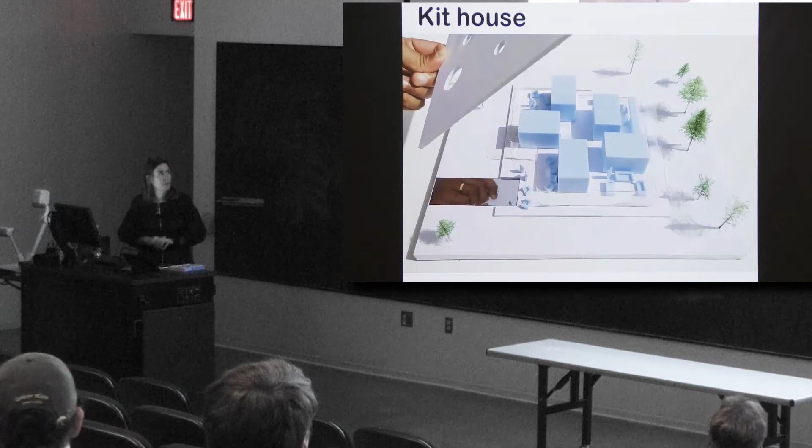We're also working with a startup to develop a kit house. Everybody's into prefab, so we're trying it, we'll see how it goes.

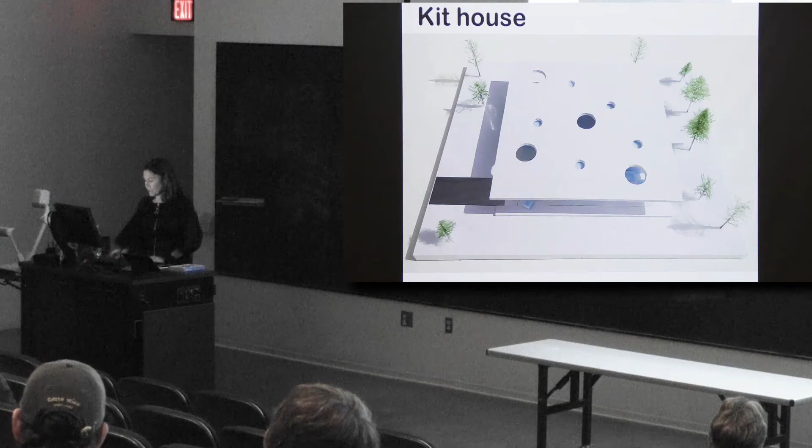We are also trying to self-develop 2 houses ourselves, which is going pretty slowly. This is on Chicago's version of the High Line, which is not as fancy but much longer, like it's basically a sidewalk, elevated. The site is right next to it, so we're thinking about how you build right next to it so that you could actually produce an effect to the public out of some very private things, which are houses. So these are not open to the public, but they might, along the 606, do something in a public way that might be interesting.

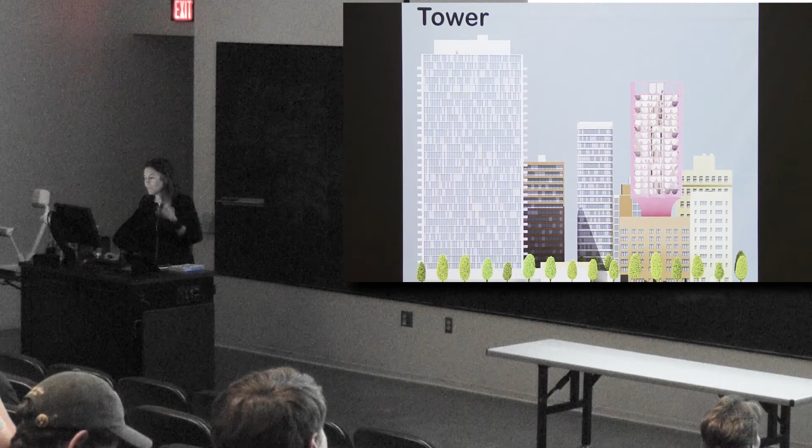And we're also looking with a developer at an addition to an existing building, actually rebuilding an existing building in the Gold Coast to basically double the size of the building by rebuilding it with a little tower that we're showing here as pink. We'll see how long we can get away with that.

But thinking about that. And then, as I mentioned before, we're also looking at the highway system in Chicago with CMAP, and thinking about that in the next year or so with them.